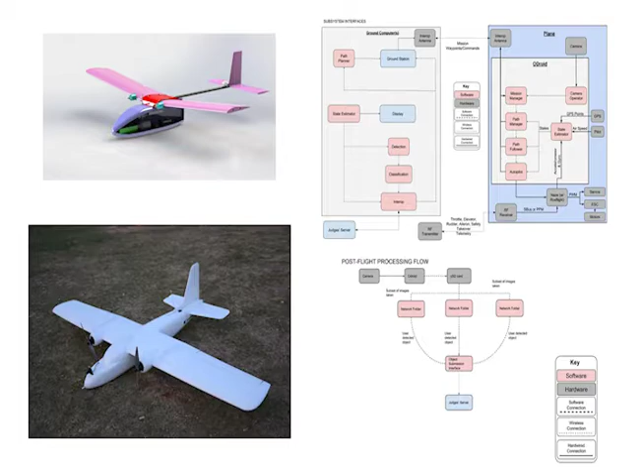UAS concepts. After selecting the desired concept, the team moved to subsystem engineering, creating prototypes, models, and simulations to develop and test UAS subsystem performance. Finally, the team combined the subsystems and worked through system refinement, performing mission tests and making small modifications to maximize competition score. The team used a parallel path approach throughout this design process.

One path was dedicated to improving autopilot and imaging capabilities on last year's platform, the My Twin Dream airframe. The second path focused on designing and building a custom airframe more suited for the competition needs. Once the new airframe was ready, autopilot and imaging systems would be integrated.

Unfortunately, during the system refinement stage of the design process, the custom airframe suffered a devastating crash that would require nearly every major component to be remade. Due to time constraints, the team has decided to not build another airframe as documented in the technical design paper. Rather, they will fly again with the proven My Twin Dream platform at competition.

The My Twin Dream fuselage, while not as customizable as the fuselage previously discussed, is an exceptionally stable and versatile fuselage that is more than capable of fulfilling all AUVSI competition requirements. The airframe is comprised of 4 sections: the main body, which houses the majority of the plane's electrical components, the tail section, and the 2 wing panels.

Due to the difficulties in transporting last year's model to the competition, this year's model of the My Twin Dream was assembled with transportation in mind, and can be more easily disassembled. Other major changes between this year's My Twin Dream and last year's version are the new motors, which are better suited to be used with our 4-cell battery and provide greater thrust-to-drag ratio, the Basler Ace camera with 12.5mm Ricoh

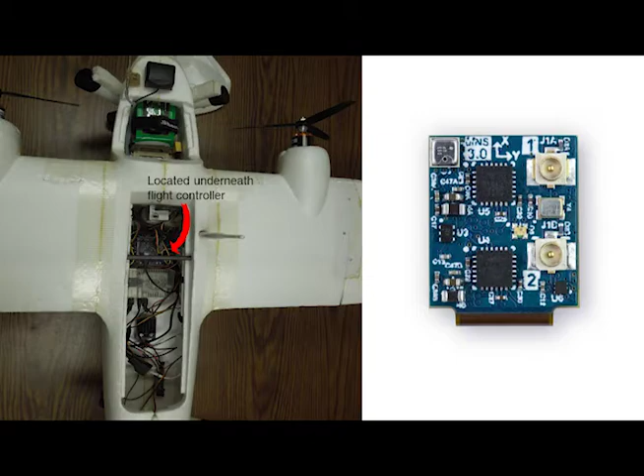C-mount lens, a new camera that offers higher resolution images, along with a new mounting system that isolates the camera in the event of a crash, and the Inertial Sense Micro INS, a GPS-aided inertial navigation system that is far more robust and accurate than last year's system.

Other critical components include the Odroid XU4 computer, the onboard processing unit, the Ubiquiti antenna, which enables wireless communication between the ground station and the UAS, the pitot tube and I2C digital sensor used to digitally provide the plane's airspeed, the Flip 32 Plus baseboard, which, combined with a custom-made PCB, is used as the onboard autopilot flight controller,

FrSky R9M and R9 combo, a 900 MHz long-range transmitter-receiver combo, and the E-flite 405 servoless payload release, which will be used for the water bottle drop during the competition. All of these systems are powered using a Multistar 10,000 mAh LiPo battery. Finally, the autopilot system is run using ROSplane, an autopilot program created by the BYU MAGICC Lab using ROS and augmented by this year's BYU AUVSI autopilot subteam.

In the autonomous flight category, autonomous takeoff, attempted, high confidence. Autonomous landing, attempted, high confidence. Waypoint capture, attempted, medium confidence. For obstacle avoidance, stationary obstacles, attempted, medium confidence. Dynamic obstacles,

not attempted. For object detection, localization, and classification: search area detection, attempted, medium confidence. Off-axis detection, attempted, low confidence. Localization, attempted, medium confidence. Classification, attempted, medium confidence. Autonomous ODLC, not attempted. For air delivery, attempted, medium confidence.

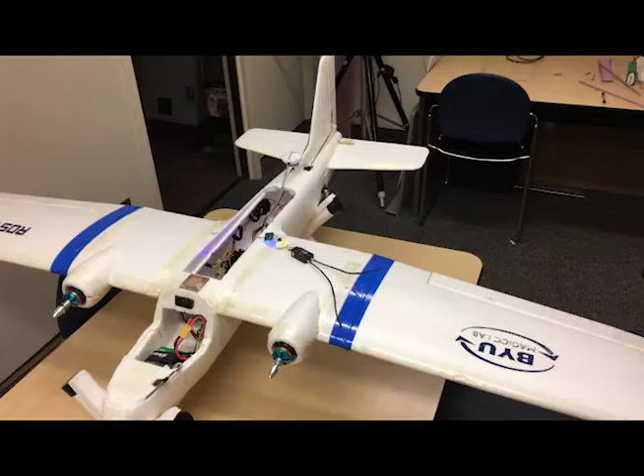Finally, frequent flight tests enabled the team to identify and resolve other issues, such as power distribution and occasional telemetry loss. Encountering these issues early has allowed for more thorough preparation for undesired contingencies. Over the course of the past year, we have conducted over 70 flight tests. The first few flights were mostly under manual control. Autonomous flight was sustained for only a few seconds at a time for tuning.

As the aircraft and autopilot improved, the percentage of autonomous flying increased. The last few flights have been over 95% autonomous. The only RC takeovers have been for landing the aircraft. There has been one flight entirely under autonomous control.

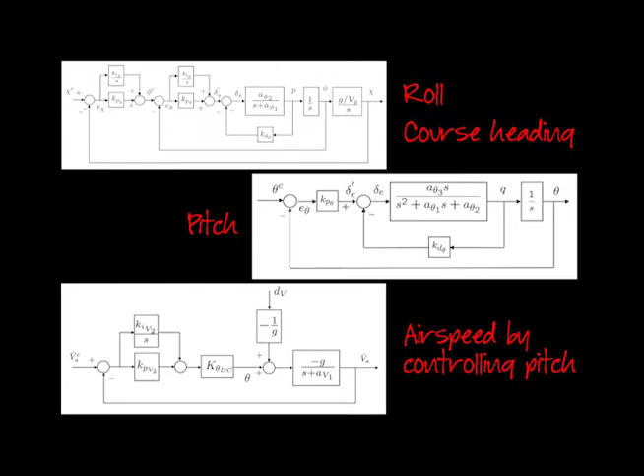The autopilot ROSplane has 6 PID controllers: roll, course heading, pitch, airspeed by controlling pitch, airspeed by controlling throttle, and altitude by controlling pitch. ROSplane uses different controllers depending on the current altitude zone of the UAV. Each controller can be tuned while flying. A GUI is used to change gains mid-flight.

Each gain is changed until the UAV responds quickly, is stable, and has low overshoot. Most controllers can be isolated by putting the UAV in a certain altitude zone or by commenting out other controllers in the code. Roll and pitch controllers are tuned first. They are used in every altitude zone. The course controller is removed until the other controllers are tuned. Next, the airspeed controllers are tuned. Airspeed is controlled using successive loop closure.

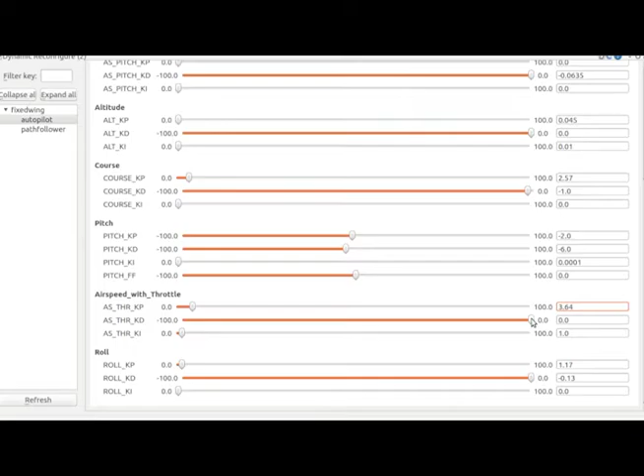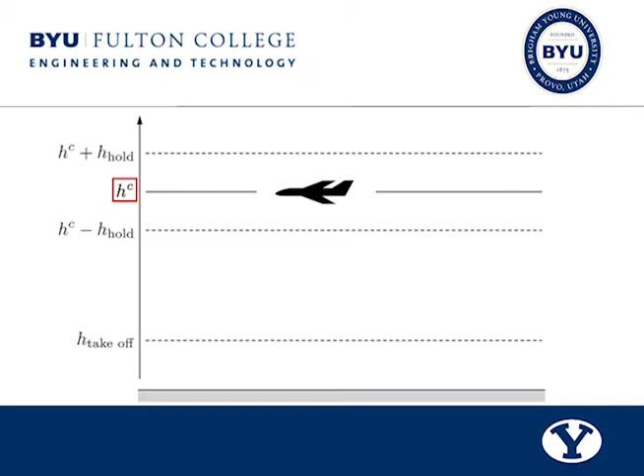In the climb and descent zones, airspeed is regulated by controlling pitch, while in the altitude hold zone, airspeed is regulated by controlling throttle. While the UAV is close to the desired altitude, it is in the hold zone. In the hold zone, altitude is controlled by using successive loop closure with the pitch controller as the inner loop. Finally, the course controller is brought back and tuned until the response is desirable.

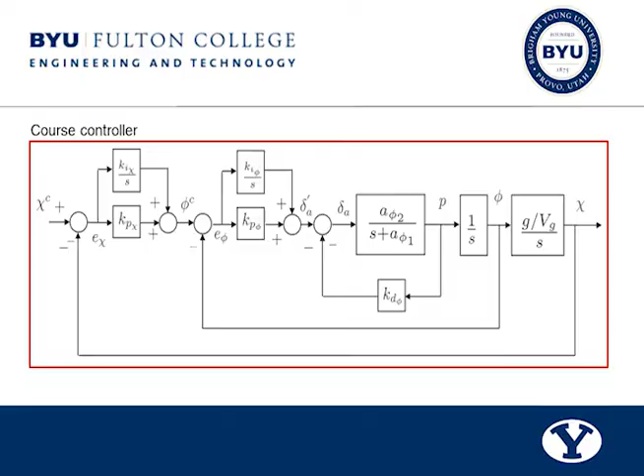From 4 mock competitions, a total of 15 waypoints were attempted. Waypoints were randomly generated in the flight zone. 14 of 15 waypoints were attained with an average missed distance of 14.6 meters. While we were flying the waypoint path, however, we breached the boundaries.

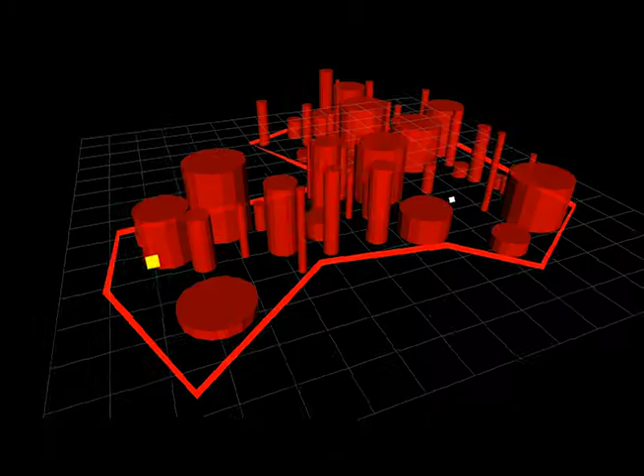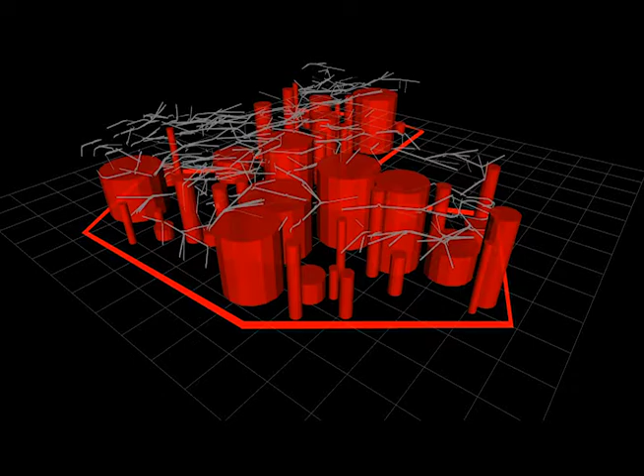The obstacle avoidance system uses the rapidly exploring random tree algorithm that our team developed. The algorithm creates intermediate waypoints that connect the white initial position of the UAV to the yellow primary waypoint. It expands potential paths starting from the initial position. Paths are added to the tree if they avoid all obstacles, stay within the flight boundaries, and are possible for the UAV to follow. Once the tree develops enough to connect to the waypoint, the path is smoothed.

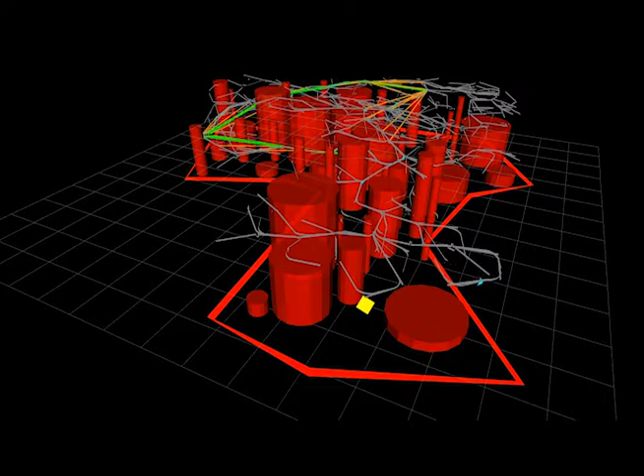The rough path is represented in blue. Each intermediate waypoint along the rough path is left out to see if it is not needed. The extra waypoints are discarded from the path. The smoothed path is represented in green. Once the algorithm has found the final path, it is sent to the UAV to be flown. In 4 separate mock competitions, each with 10 stationary obstacles, our airframe avoided 40 out of 40 obstacles.

The team conducted tests regarding image resolution, image transmission rate from the plane to the ground station, and ideal image overlap while searching for objects. Using a depth of field, angle of view, and equivalent lens calculation, we determined the average resolution of objects that the camera will be able to provide.

The Basler Ace ACA 2500 60UC has a sensor size of 1 inch and a focal length of 12.5 millimeters. Knowing that the number of horizontal pixels is 2,592 and the number of vertical pixels is 2,048, we determined that the camera would be able to resolve images up to 12.64 pixels per foot at a height of 200 feet.

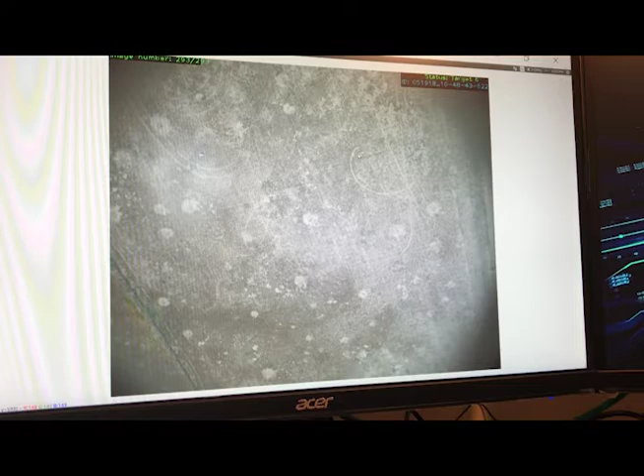Along with resolution, we performed more than 5 test flights ensuring that the image transmission rate was sufficient to give ample overlap of the search area. The average transmission rate was 1 Hz, and the target overlap for each consecutive image was about 50%. After testing, we concluded that the overlap was approximately 37%. Although slightly below the target value, this is still enough overlap to have duplicate images of the search area, thus increasing our chance of detecting every target in the search area.

The imaging team conducted a distinguishable colors test to determine how many human distinguishable colors the camera could capture. To do this, the camera took several pictures of a color grid at various distances. These pictures were compressed by the onboard computer and sent to the ground station, where a ground operator determined the number of distinct colors seen in the image. When running this test, the ground operator could distinguish 9 colors on average.

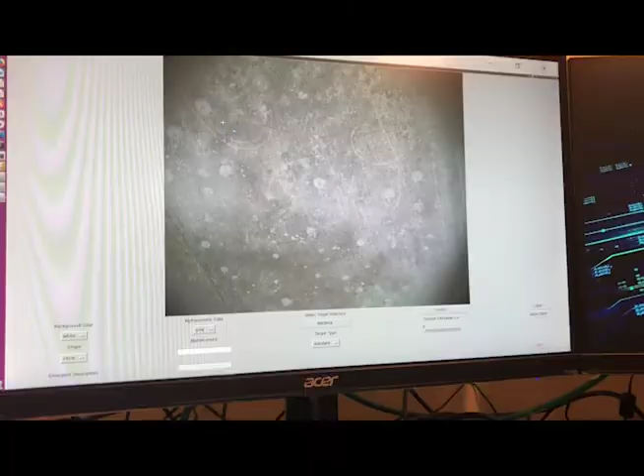Ground operators use a detection and classification GUI to supply the characteristics of each target and submit to the judges' server. This GUI ensures that each image is reviewed by a ground operator, giving us the best opportunity to properly detect and classify each object.

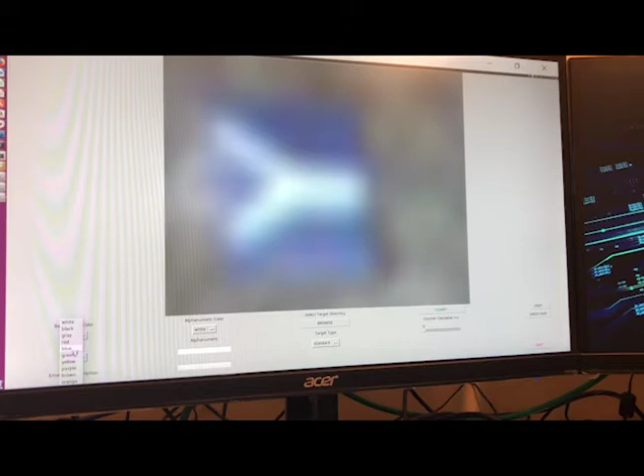Localization of targets also occurs in the imaging GUI. Clicking on a target in an image marks it with a GPS point. A target can be marked multiple times so that the GPS locations can be averaged together and submitted to the judges. This localization is based on image state information and pixel coordinates of the target in the image. Localization error during testing has ranged from 4 meters to 35 meters.

While approaching the air delivery position, ROSplane uses pursuit guidance law. The guidance law converges the UAS's velocity vector to point directly above the delivery position. The estimated missed distance of the drop is continually calculated upon approach. The bottle is dropped when the horizontal distance the bottle would travel if dropped now is greater than the horizontal distance from the UAS to the delivery position. This gives the longest time for the pursuit guidance to drive the missed distance down.

The water bottle drop has only been tested in simulation. When dropped from 45 meters, there is an average missed distance of 3.76 meters. We plan on testing the bottle drop performance in the coming week.

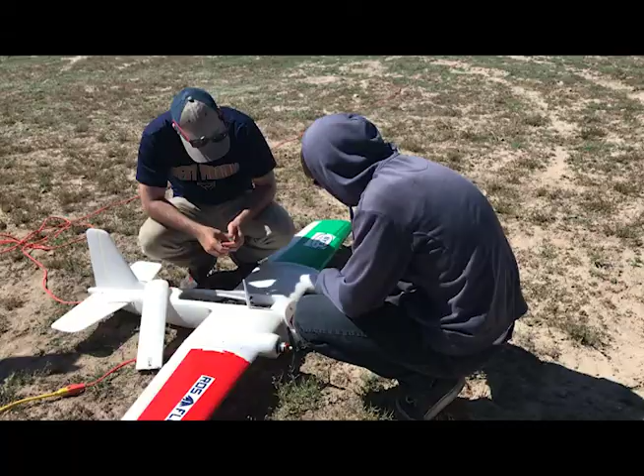So far, the team has conducted 4 mission tests. These tests have consisted solely of flying waypoints and avoiding static obstacles. During each test, we encountered issues prohibiting us from attempting the other objectives. For example, during one of these tests, we discovered our turning radius in the path planner to be too large, making it difficult to track a commanded path and effectively fly over the search area. It also caused the UAS to fly outside the mission boundaries.

In another test, we encountered power issues from having all of the components powered on during flight. Yet another test revealed possible GPS interference from the nearby camera. Each of these system flaws has been recognized and accounted for, resulting in better performance with each successive test. In our last mission test, the UAS flew a waypoint path completely autonomously from takeoff to landing, avoiding 10 of 10 static obstacles. In the remaining time before competition, the imaging and payload delivery objectives will be tested and refined. We are confident in our ability to succeed and look forward to competing in June.